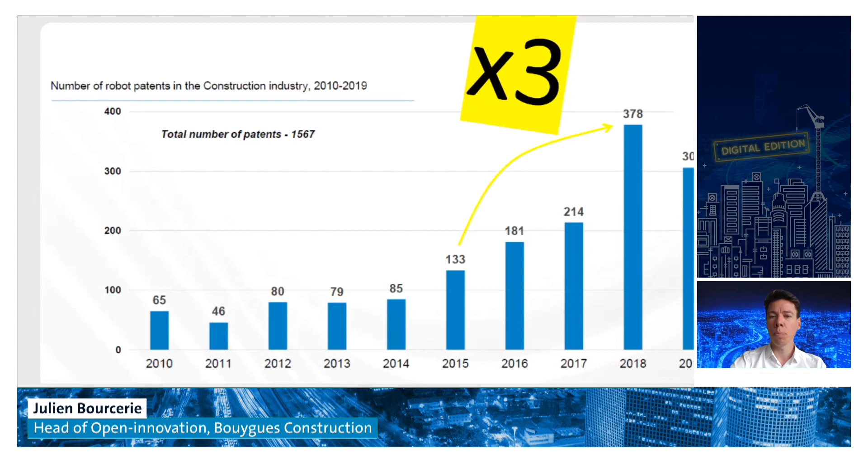Some facts to defend that. The first one is the number of robot patents in the construction industry. It has almost tripled between 2010 and 2019. So it's a fact. There is a lot of interest at the level of research coming from general contractors, from manufacturers of robots.

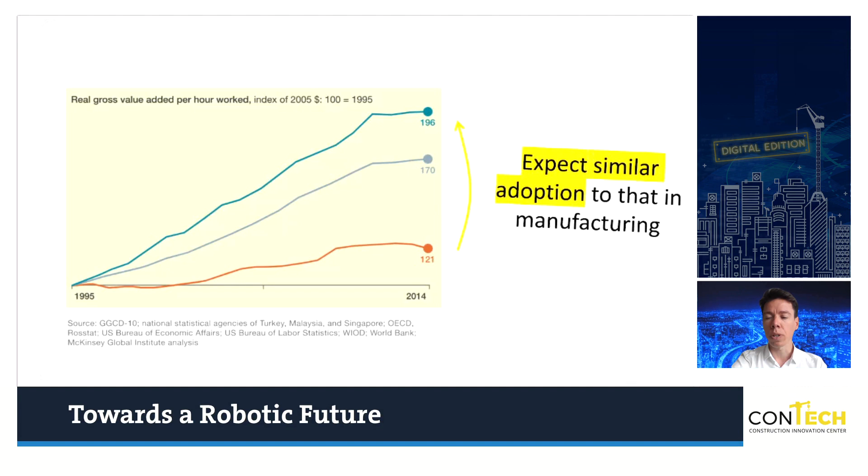Another one that you are probably comfortable with, as it has been shared a lot during the past years, is the evolution of productivity in the construction sector. So as you see in the red line, construction has not really changed its productivity in comparison to manufacturing. And we expect to have a similar adoption of robotics to what we had in manufacturing, and that could be the answer to better productivity in our industry.

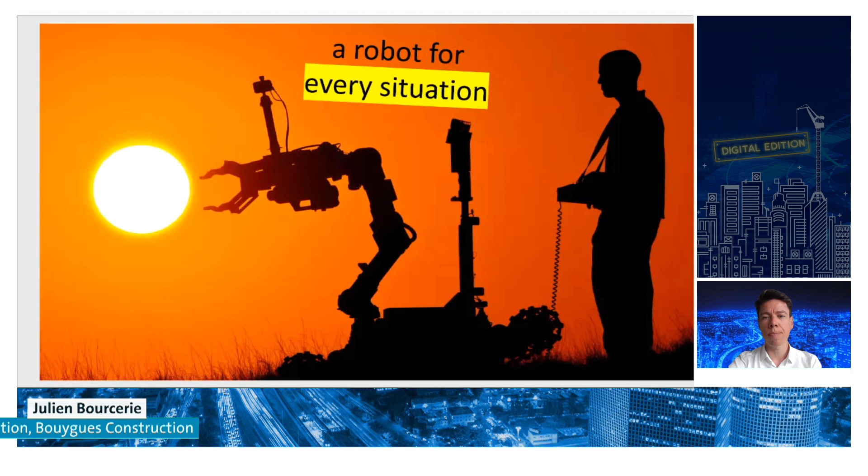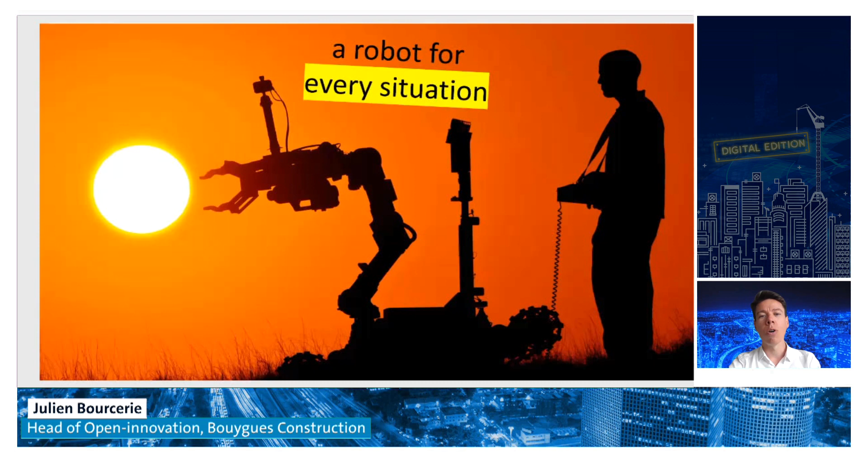So I came with the macro facts, the macro figures. Now I'm going to go a bit deeper into the qualified situations I've encountered. At Bouygues Construction, I get the opportunity to be in front of many operational people who share with me their intuition and their wishes for having a robot for any situation. It could be to remove some bins on the construction site or to pour concrete between formworks. For every situation, I see that on the field, people are asking for robots.

They are asking for that for what? For safety. That's the first point. Most of the tasks handled on a construction site are human labor. And of course, there is this matter of health and safety on the construction site, the repetitiveness of the tasks, and the idea to get faster in their tasks.

Now that I've said that, I want you to really keep in mind, as I see it in this presentation, that for me, robotics in construction is still a market of innovators and early adopters. If you go on any construction site, you will probably see one or two robots, but you won't see something like a factory made of many robots. So we are still in these first stages towards more robotics in construction.

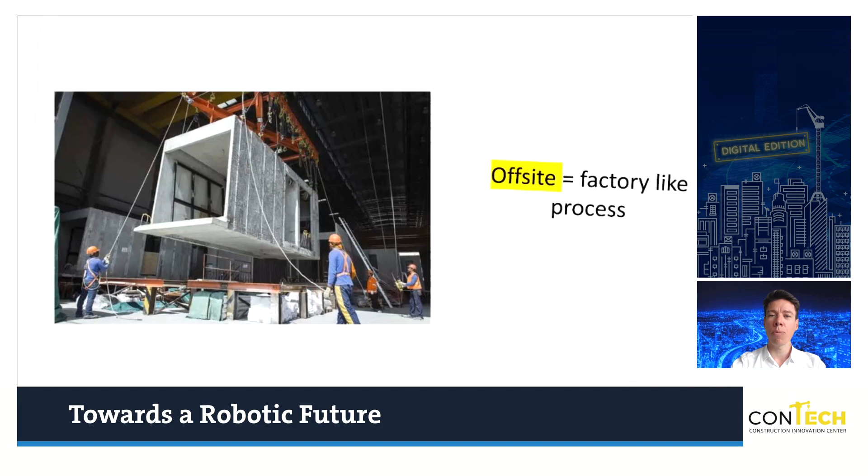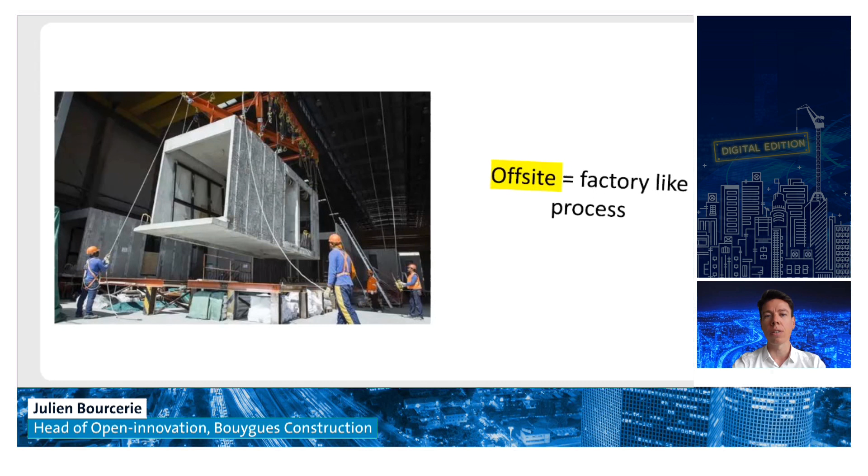And if I do some history, in construction, robotics came first with the offsite industry. So it's a bit like a factory process. So it's really close to what you can encounter in manufacturing. And it really began with offsite construction.

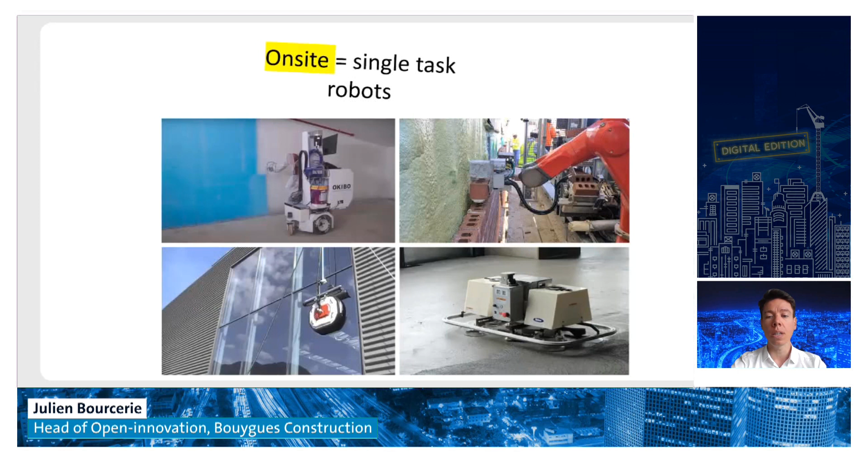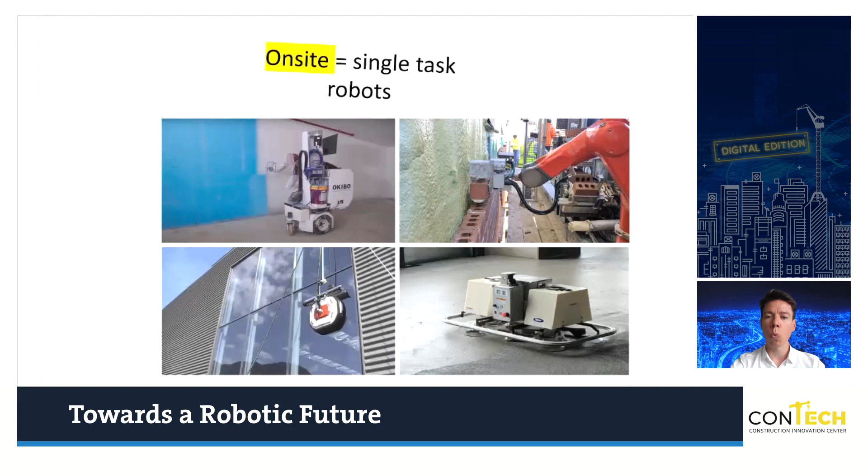Then we see what we call single task robots. They are really active on site and they are here to do one task. One task could be plumbing, could be painting, could be the concrete finishing on the slab, as you can see in the last one on the screen. So those are some examples of single task robots.

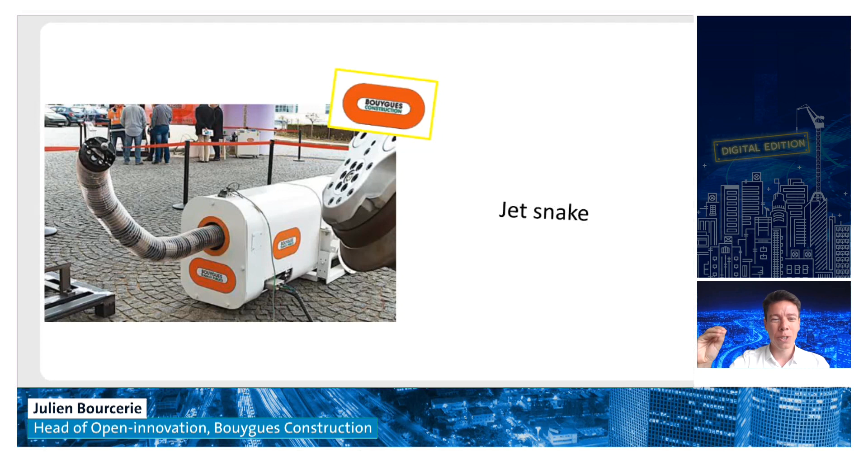Now, why am I here? That's because at Bouygues Construction, we got the chance to have this robotic department early on in our civil works department. And for example, we had some success. It was about 10 years ago. It started. It's called the Jet Snake. It's a snake, it's a good name, to clean the cutting wheels in the tunnel boring machines. So it's really a heavy task for a worker to do. And we have this example.

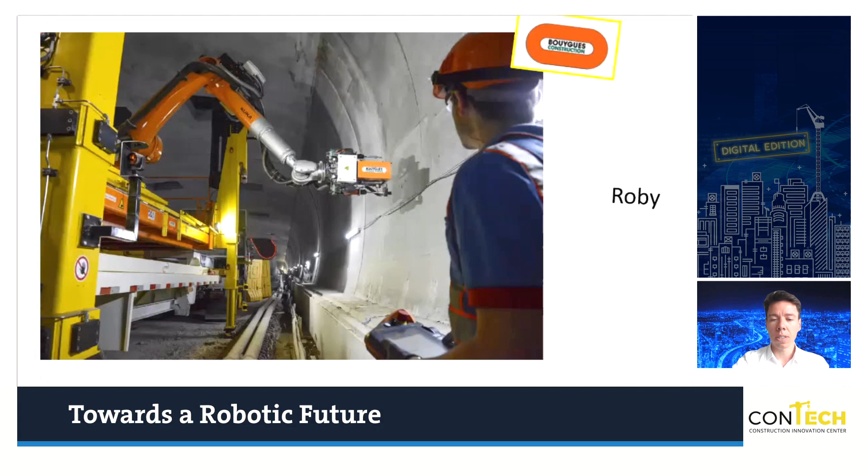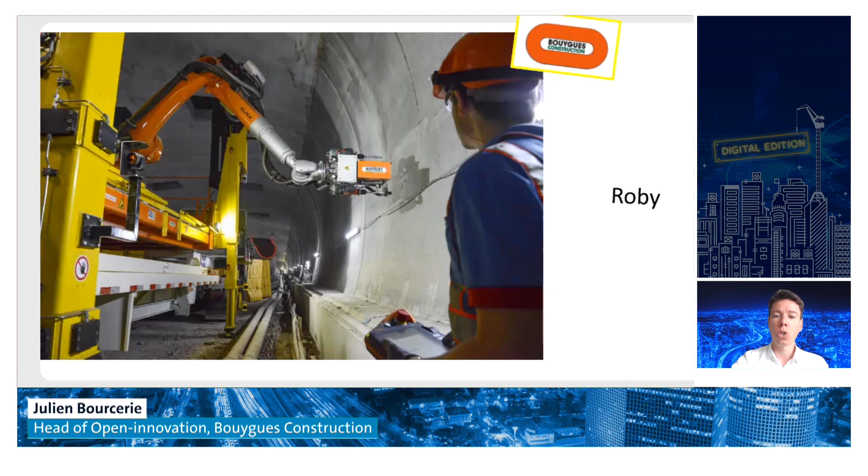We also developed other new robots like the Roby, which has been designed for repeated drillings in tunnels. Also the Telemac, to remove and replace the cutting wheels on the tunnel boring machines.

Also, more operational, more human-related robots. We've got these mid-weight load displacement robots. One is a bit more autonomous, called Effidence. It follows you like a dog. Everywhere you go, you have this trolley following you, able to move like 300 kilograms of loads. And the other one is K-Ryole, one we've developed with a startup called K-Ryole, and they developed this specific product for the construction industry.

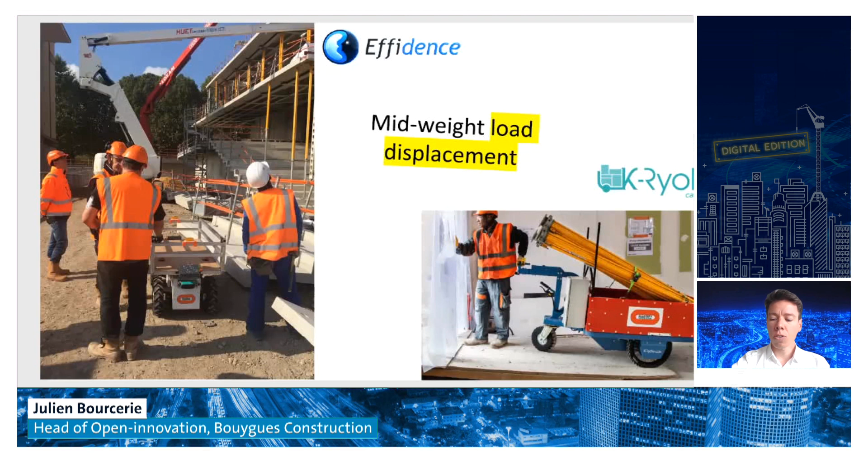Once I've said that, you can imagine that we've got robots everywhere at Bouygues Construction. To be honest, it's not the case. Adoption is really hard. Adoption is hard at Bouygues Construction, but in any company I know, even my competitors, the best ones, it's something that's really new, that is really changing the way we are doing our jobs.

When we're talking about robotics, the first companies that were offering robots came with this idea of selling robots to general contractors. And we are now experiencing new business models that are closer to offering a service. And that's really important, as our industry is more service-oriented, in a relationship between contractors, subcontractors, and so on, than an industry that is able to handle robots and to buy them.

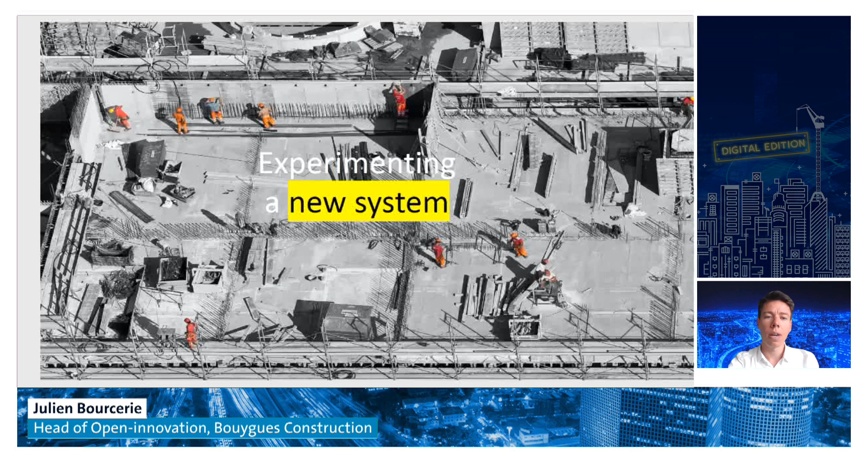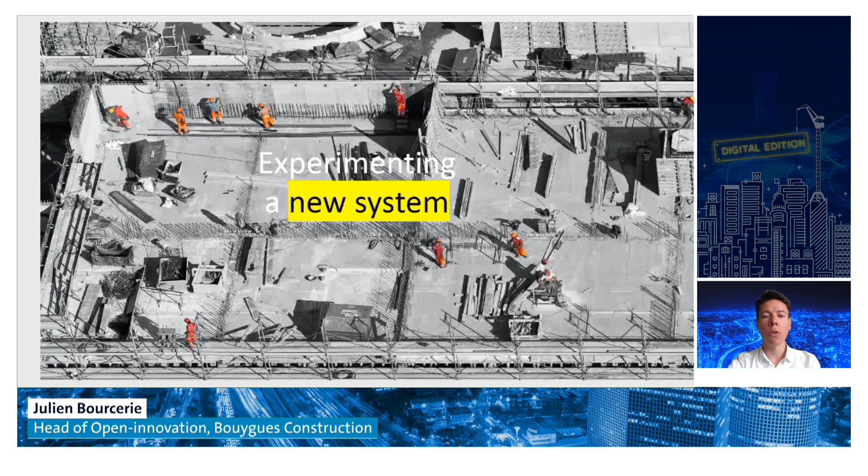Experimenting with a new ecosystem and a new system, that's what we are doing at Bouygues Construction, as we are really convinced that to implement a robot on the construction site, we need to do it as a system. We won't just bring a robot on a slab and pour concrete. We will rethink the whole system and the whole method of pouring concrete on a slab. And for that, we have developed a program called Construction Lab. The idea is really to implement several R&D projects together, different solutions, and reinvent a whole system, not just a unitary solution, a robot that we place on a construction site. I think it's really important to have this 360 view of what it will impact and what needs to be transformed at the same time that you are using robots on a construction site.

I put this structure because I really think the opportunity is to use robotics as a vector for construction transformation. I mentioned earlier, one of the barriers to the adoption of robotics is the digital process from end to end. If we are able tomorrow to have this whole digital platform, from the design to the as-built to the maintenance of the building, then we will be able to have robots on site. And I really think that if we push to experiment, doing pilots with robots on construction sites, then the digital transformation will come too, and it is coming almost in the same momentum. So that's really attractive for robotics tomorrow in the construction industry.

As a loop, I started with the robot called WALL-E. I take this example because WALL-E is here to clean the planet, but I think WALL-E could also be the key to accelerate our transition towards sustainable construction, meaning that robots could also be of great help in recycling, in cleaning, in the preparation of construction sites, in the reuse of different materials and so on. And I really think that we have to consider robots as a key element for the climate change challenge that is at the front of the construction industry.